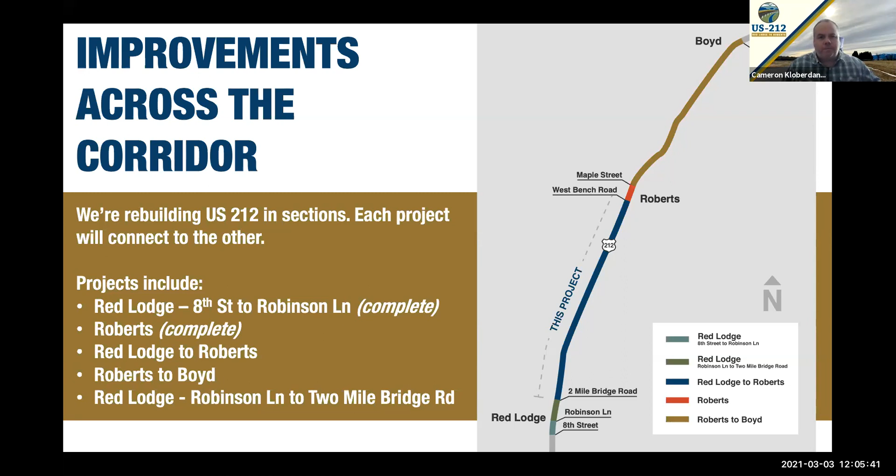Just also to give everyone an update on where we're at currently in our timeline: right now we have a plan, and we have reached out to all the landowners along our current proposed project, and we are in negotiations with them for the right-of-way that we will need to build this project. We kind of anticipate that taking one to two years. As you know, we're meeting virtually today, and you can imagine our process for meeting with landowners has also been affected by the limitations of being able to meet in person. So that's why we have that wiggle room of one to two years.

And then hopefully we'll have a project ready for advertisement to select a construction company sometime around 2023. But again, we have to include that there are limitations there as well with that schedule.

It is dependent on our funding. When we start projecting out that far, we have some differences in how things are developed, where things fall. Most of our funding comes from federal sources, and that introduces a little bit of uncertainty in the future. So that's where I'm at right now.

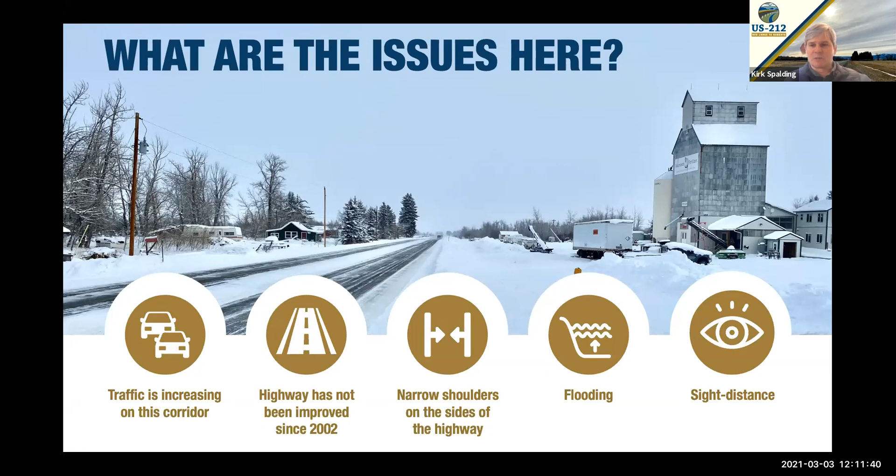And then also for those pulling out from the sides, the vegetation that's in a lot of places really obscures your view of oncoming traffic. That vegetation will be peeled back to improve the sight distance along there. So, going to the next slide here, what are we going to do to mitigate this situation?

One of the main things is moving traffic safely. In addition to widening the shoulders, we're also going to put in a fair amount of passing lanes, around 4 miles total. We're proposing 2.2 miles of northbound passing and about 1.7 miles of southbound passing. To get an idea, if you're looking at the mile posts along the road, the northbound passing lanes are around mile post 72 to 75, and the southbound passing lanes are around 79 to 81.

So the passing lanes are obviously one of the main features we're talking about to improve. This project is nearly 10 miles long, and there'll be a complete reconstruction from edge asphalt to edge asphalt, plus the expanded shoulders necessary. So expect new surfacing and a really nice facility when it's all said and done.

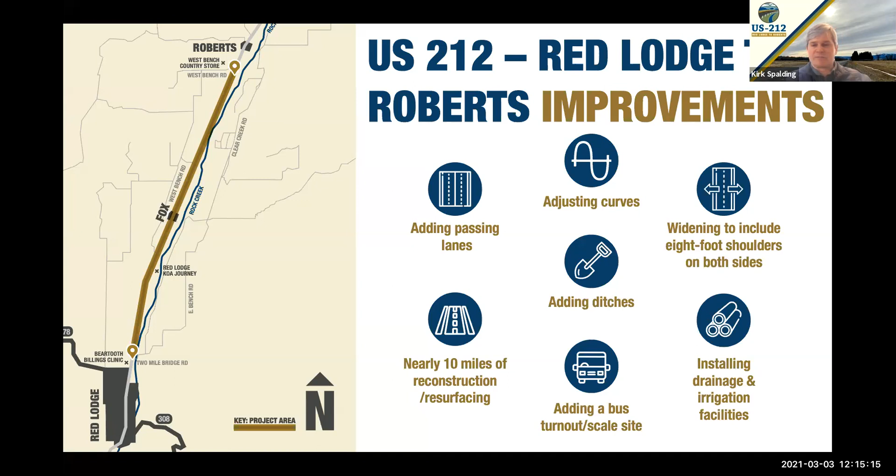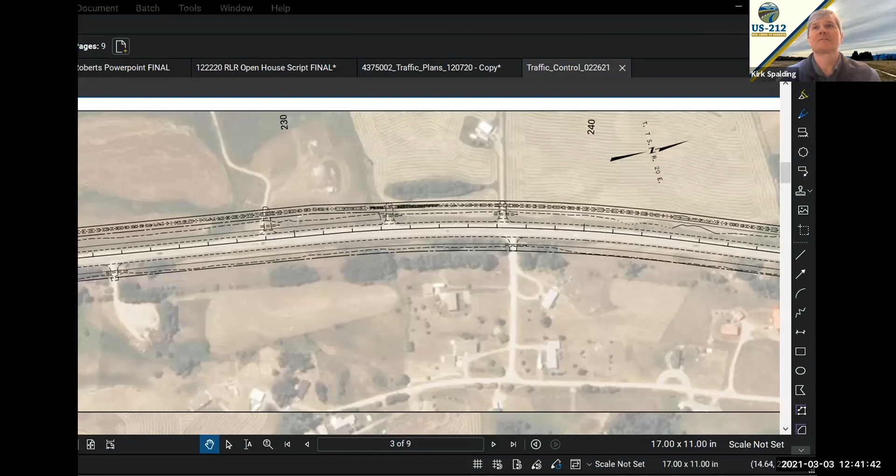Okay, let's see, give me to share here. Go on to this one. Do you guys see some road plans here? We do. Okay, so let me go to the traffic plans, which help a little bit to show the layout of the passing lanes.

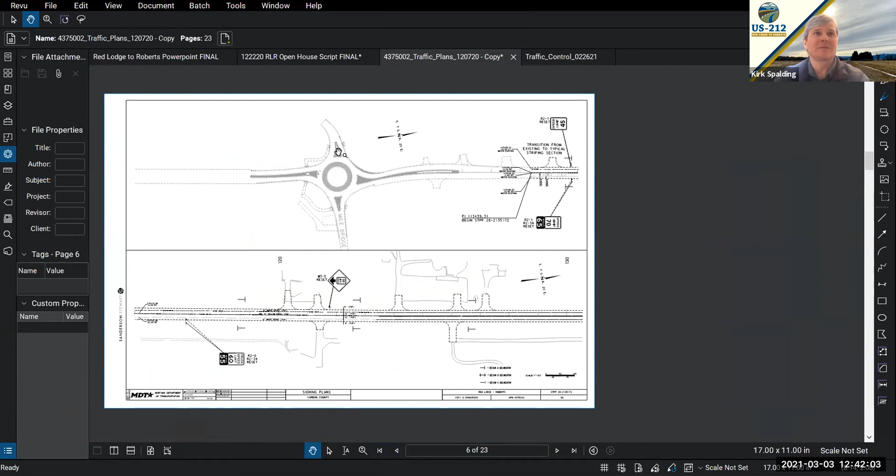I'm going to start here, and this may help with some of the other questions about where this project truly begins. At the top of the screen, we have the roundabout proposed with the Robinson to 2 Mile project. This goes to the hospital - this is 2 Mile Bridge Road. The limits extend up about 3 approaches, and then this project we're talking about today takes off from here. You can see the speed limit is 70 heading northbound and reduces to 45 coming into the roundabout. There's all kinds of warning signs too. But as you extend to the north, again, this is a split frame.

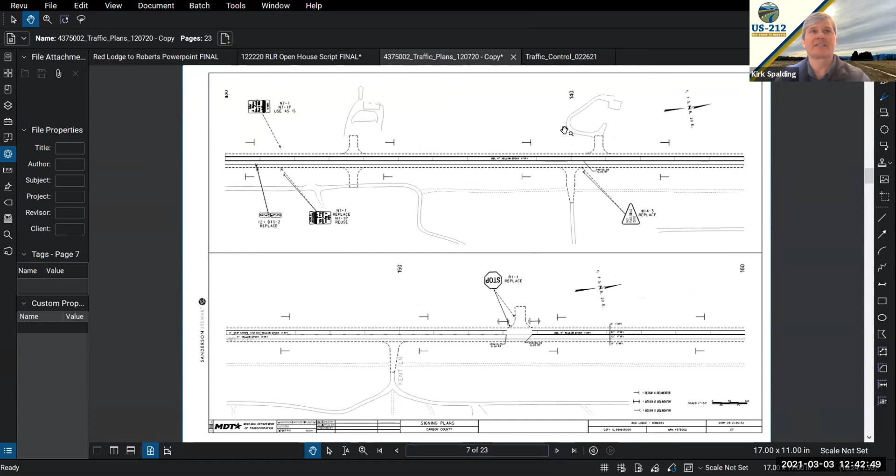So this is the beginning of the project, and it picks up and continues over here, continuing on for a mile or so. We actually have a little bit of an alignment shift that starts through here to avoid a lot of the private ponds and things along the sides. You can see there's some two-way passing here, and then it goes to double yellow.

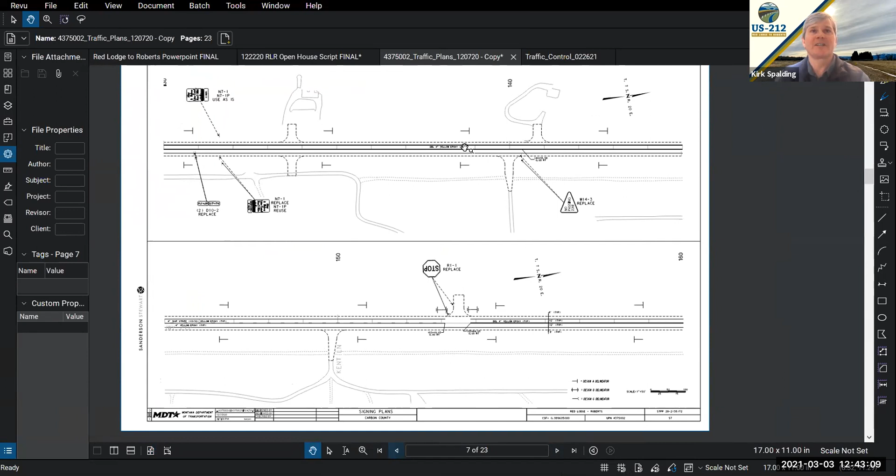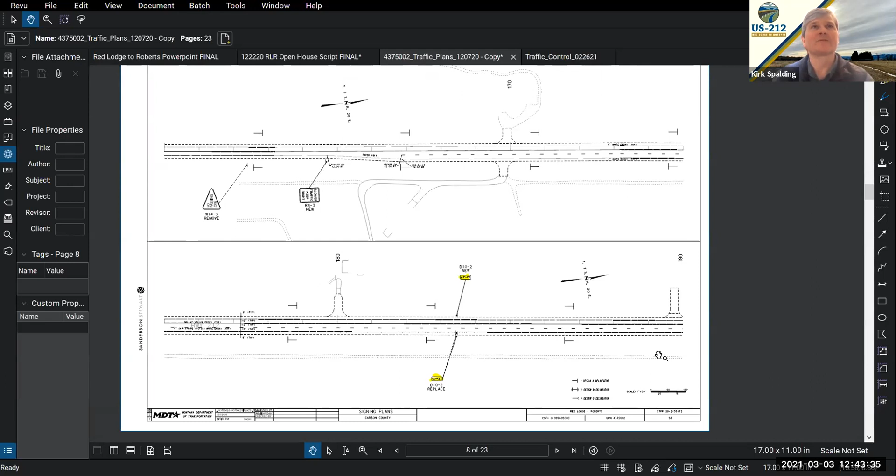As we move further north here, these stations are 100-foot ticks, so here's 1,000 feet. If we take off from 2 Mile Bridge Road, let's say this is 1,000, 2,000, 3,000, 4,000, 5,000 feet. We've gone a mile so far, and then you enter into that first passing lane. The county pit is up here on the hill, and this is where that passing lane begins and continues northbound. I think it's 2.2 miles going northbound here.

Then we get up to the curve, and it goes around that real flat curve. It's really the only curve between Red Lodge and Roberts. That curve continues on around and then it'll merge back.

I know there were questions before this meeting about how the passing lanes end. This is the very conventional triple diagonal arrow. There's usually 2 to 3 sets of those depending upon the speeds. In this case, there's 3 sets to try and give people a recovery area in case they miss the signs that the passing lane is going to end. So again, this goes about 2 miles.

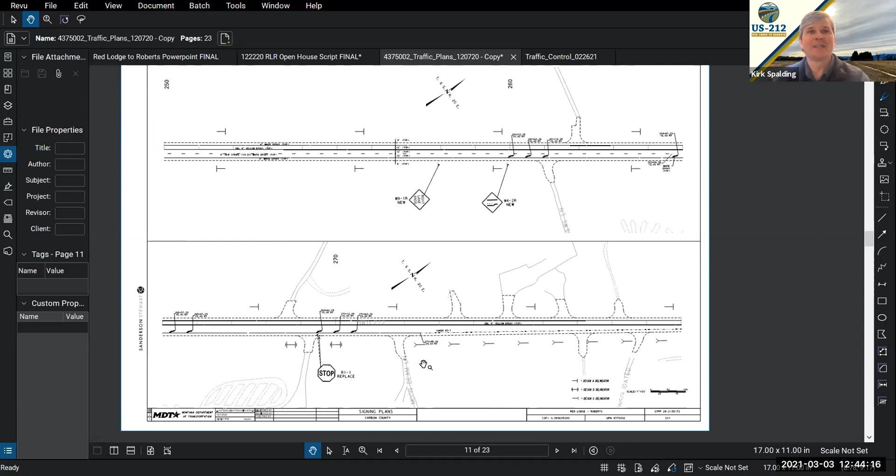If we go to the end and work our way back from Roberts, I'm going to go to the very north end here. This connects to the project that was just constructed associated with the Roberts project, so people probably have a pretty good feel for where the end of that asphalt starts. And we jump right into the passing lane going southbound. This one, in that proximity, I think is 1.7 miles of southbound passing lane.

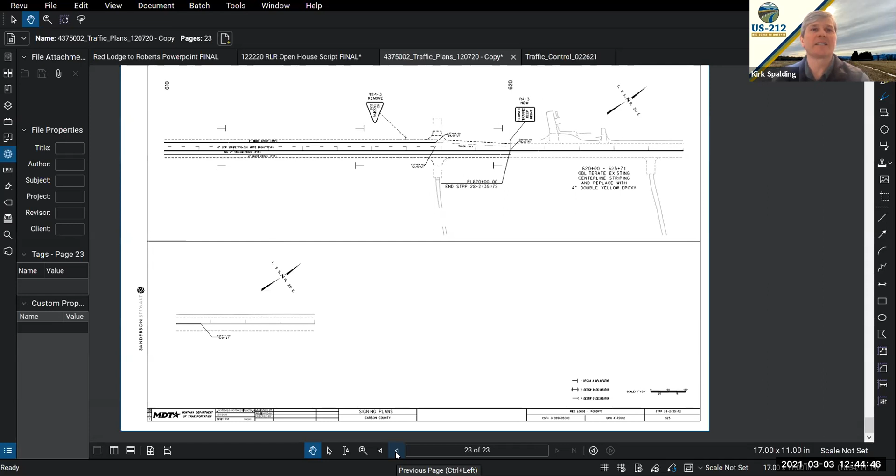Now keep in mind, we're actually headed south as I go through here. So we're down here, and then we're up here, and you can see the dimensions of the lanes here. You've got the 8-foot shoulder, the 12-foot travel lanes, including the 2 passing lanes here. So that kind of gives you the idea.

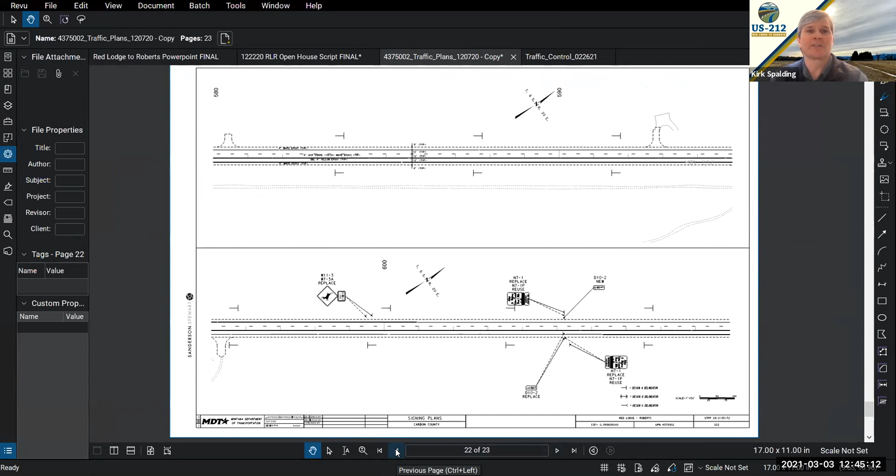Obviously, the animal signs will be updated to be really reflective of whatever the current MUTCD traffic standards are, and all signing will be brought up to current standards associated with passing lanes. So you'll see the right lane ends, you'll see the merge left, you'll see all those kinds of things, new milepost signs and all of that.